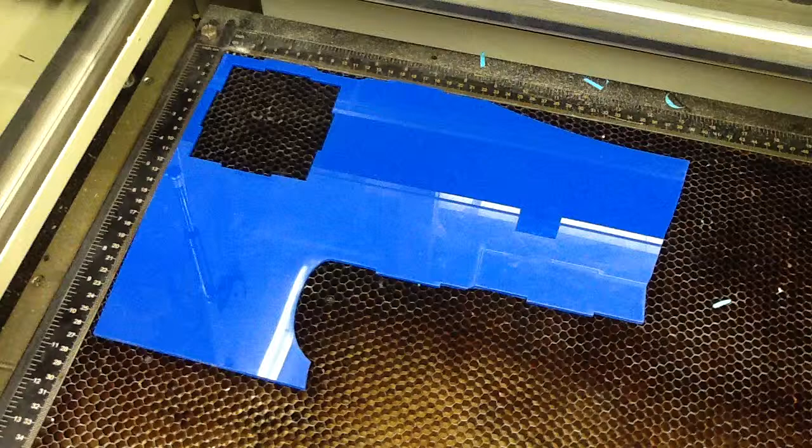Okay, so I've just cut out that piece of acrylic for the top of my box. As you can see, this has been taken out of a spare bit of acrylic. It's always good to try and use all of the offcuts so that you're not using a new piece every time, which obviously is quite expensive.

And you can see there that I've got a recess there. What I want to do is actually cut another piece out which is identical just next to that. If we have a look back at my design, you can see on the screen that at the top left is the shape that I want. Next to that are all the other shapes that I don't want.

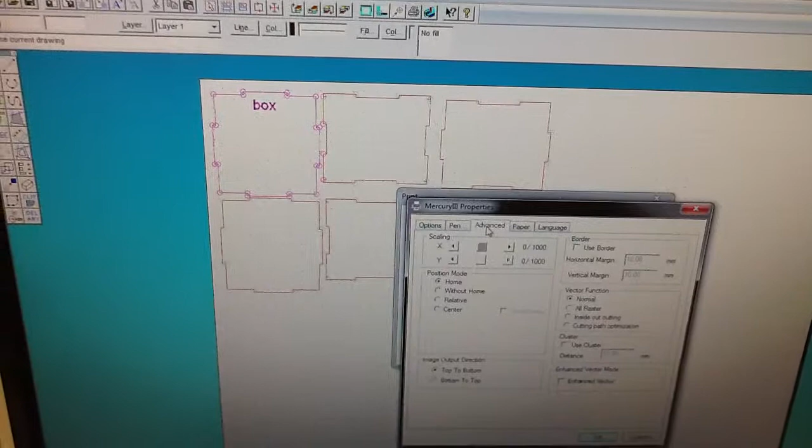There are two ways of cutting out this shape again. The first one is to take all the remaining 5 shapes and move them out of the way and copy and paste my original shape so it's next to that lid, and then recut as I would have done before.

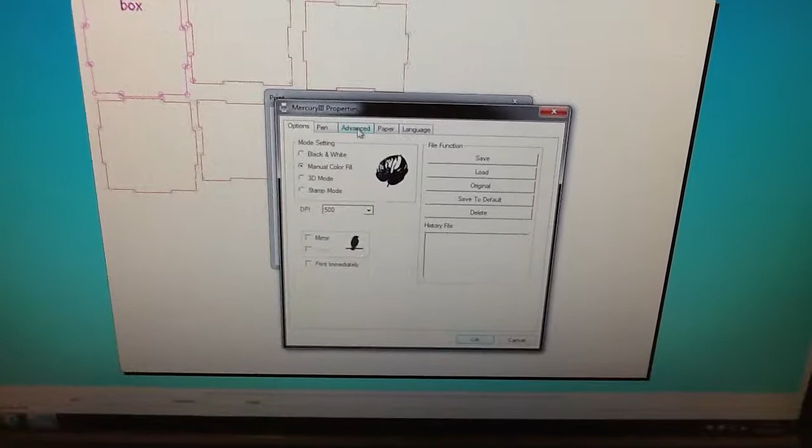The other way, which I think is a little bit more easy, is to go to the properties again, as you might do. So get rid of those. File, print, click on properties. Instead of going to pen, this time we go to advanced. You can see there that there's several options: home, without home, relative or center. Now for this operation we want relative.

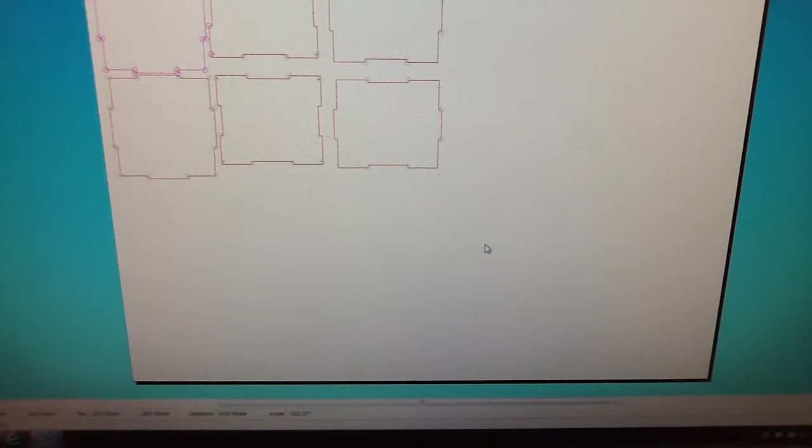By clicking on this and then going OK, what we're doing is we're telling the laser cutter that whatever we are cutting is going to be positioned on the piece of material relative to where that home point was there.

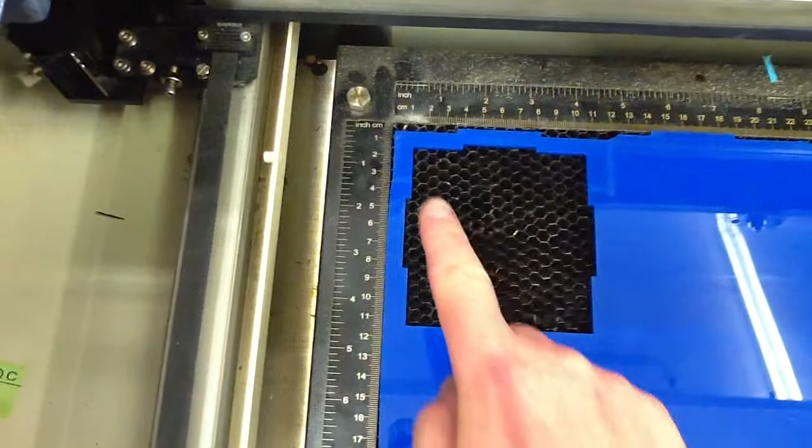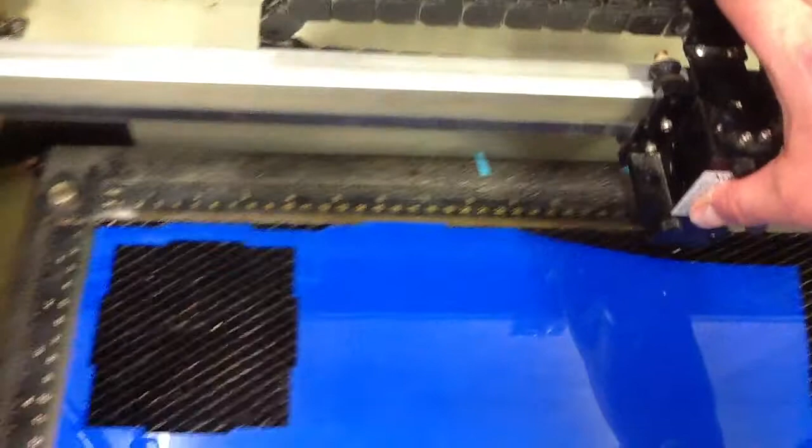And as long as we've got our design on our sheet in the top left hand corner, we can take the housing, again for the laser, and we can move it to exactly where we want. You can't see here, but there is a little red dot, and that gives us a guide as to where our laser wants to be. Now to the laser cutter, that is the home position.

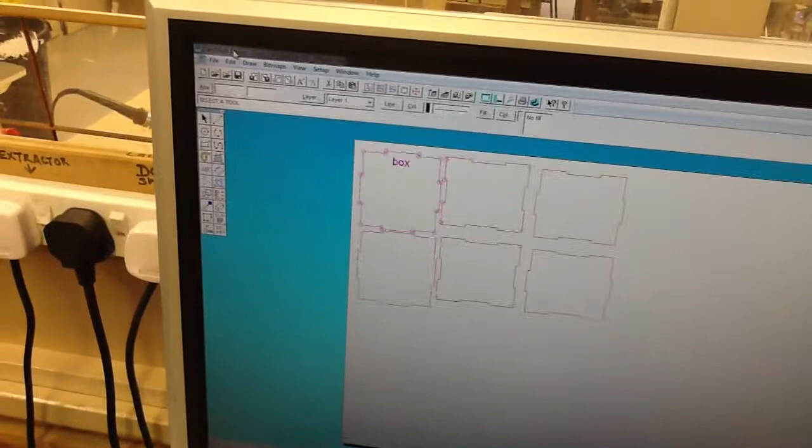All we have to do now is make sure that box is highlighted, file, print, make sure my extractors are on. Close my lid and press start. And that will now start cutting where I want it to cut.

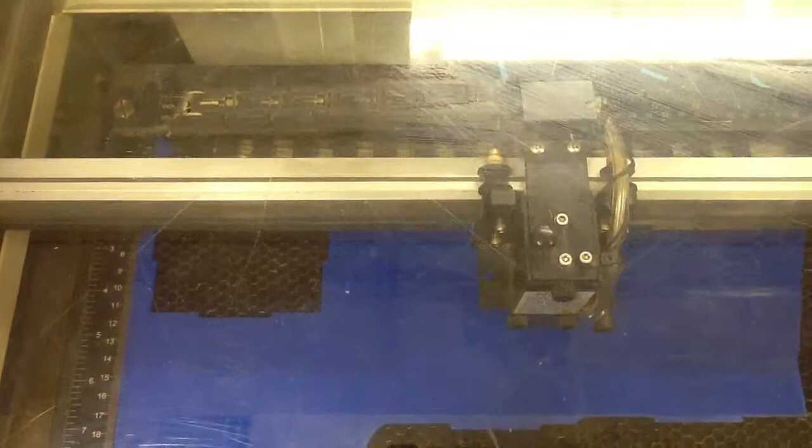The only thing you must remember to do, if you're using the relative function, is once you've finished, go back, file, print, properties, advanced, home.

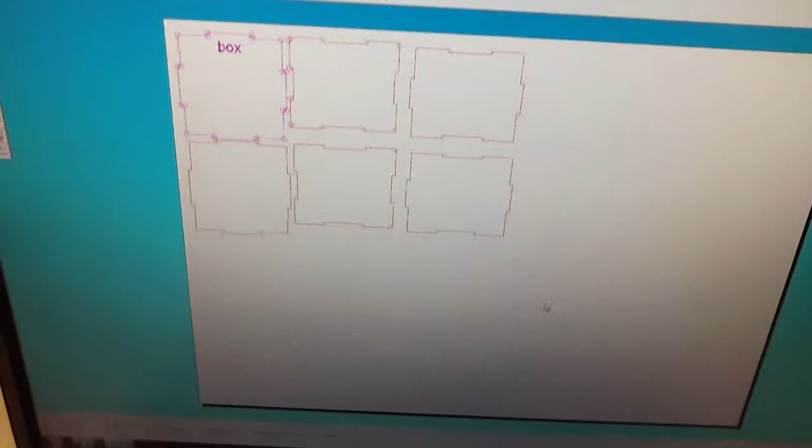If you don't do that, what's going to happen is the laser cutter will either start cutting at some random place depending on where the laser cutter was last, or it will think that it's cutting somewhere off the piece of material, and you'll get an error message which should give you cause to realise that it's not on home.